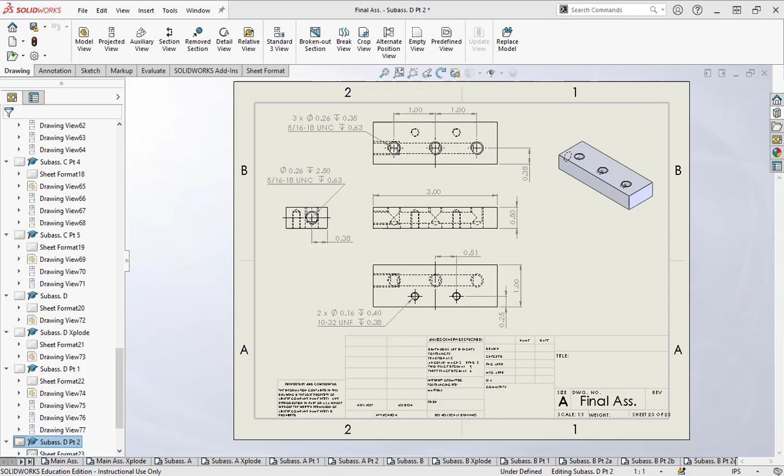Right, let's go ahead and take a look at the Three Sisters drawing package. And when I say a drawing package, this is one drawing file. This is a single drawing file. It is not 23 files. It is a single file. And if you look down here at the bottom, each of these tabs is a page.

So if you're one of those people that you're just used to having 50 drawing files, multiple drawing files, think about it this way. Each of these tabs represents a file. But nobody in business or anywhere wants to open up your folder containing 50 different drawings and look at them individually. You want to see how they relate to everything else and the subassembly.

So what we have here is a drawing package flow. So I'm going over right now the drawing package requirements for the Three Sisters and the 32 tall. These are the same requirements, the same flow. You want A size paper, 8.5 by 11. And this is the format that I'm looking for. This is the default A size in my SolidWorks install.

Okay, I want this mess. I want this. And here's the thing about sheet format. You don't get to choose your sheet format. The company you work for crams that sheet format down your throat, and that's what you use, and that's what I'm doing here. This is the worst sheet format that exists. So if you can make your stuff look good in this, you can make it look good anywhere.

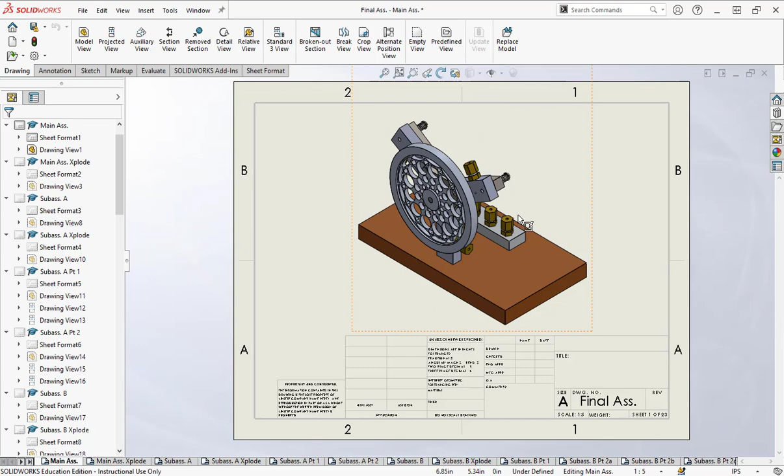The next page is the explode. I'll be going over explodes in a different video, but this is the main subassembly exploded into its subassemblies. The student chose 4 subassemblies. He or she named them A, B, C, and D. And they are labeled or ballooned with the corresponding letter. You could use a number if you want. This particular student chose to use letters. That's fine. And that's all it is. Notice that there are no callouts on the hardware. The hardware just sort of exists.

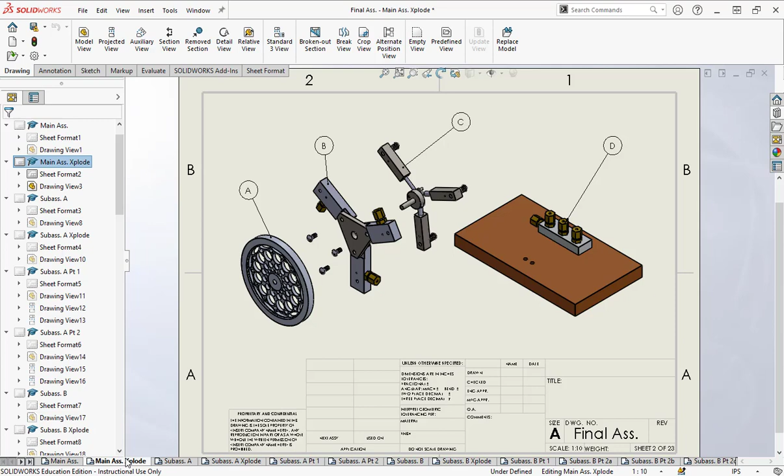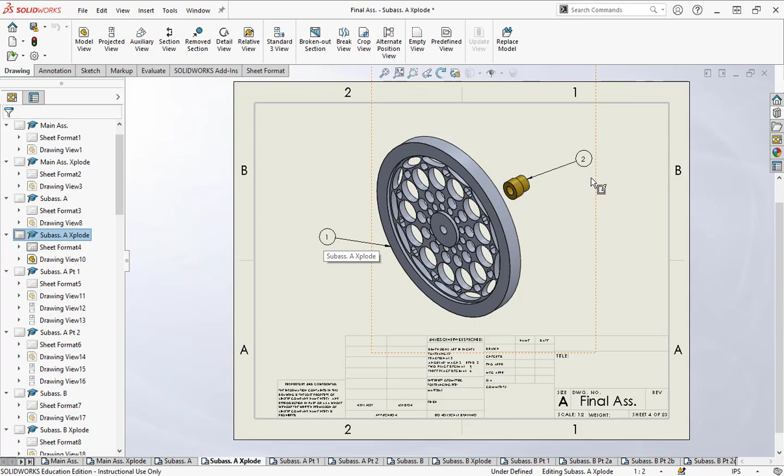Okay? So the first page is the main assembly. The next page is the main assembly exploded, also shaded with edges. The next page is the isometric view of the first subassembly. So in this case, this is subassembly A. My next page is going to be an isometric view, shaded with edges, of subassembly A. My next page will be the exploded view of subassembly A, and in this case, it's just 2 parts. But they are ballooned, they're labeled, and this particular student chose to use numbers for their parts, and they are labeled part 1 and part 2.

So my next page is the very first part of the very first subassembly. And in this case, it's the flywheel, and he called this subassembly A part 1. I wouldn't call it that. I would call it A1, personally, A-1. For your flywheel, because some of you are going to get super tricky with your flywheel, you do not need to dimension the inside. That would be a lifetime of regret in this one, okay?

I just want the side view showing the overall diameter and the overall thickness, which this particular student did do, and the cutout depth, okay? So this view, and it's evident on your drawing package which one I'm talking about. But this will save you a day, okay? You don't need to dimension the inside of this.

My next page is going to be the next part. Notice also, in terms of flow, when you get to the part, you will always have a small isometric view, shaded with edges, in the upper right-hand corner. It doesn't have to be the same scale as your front, top, right side, whatever. You're always going to have an isometric view.

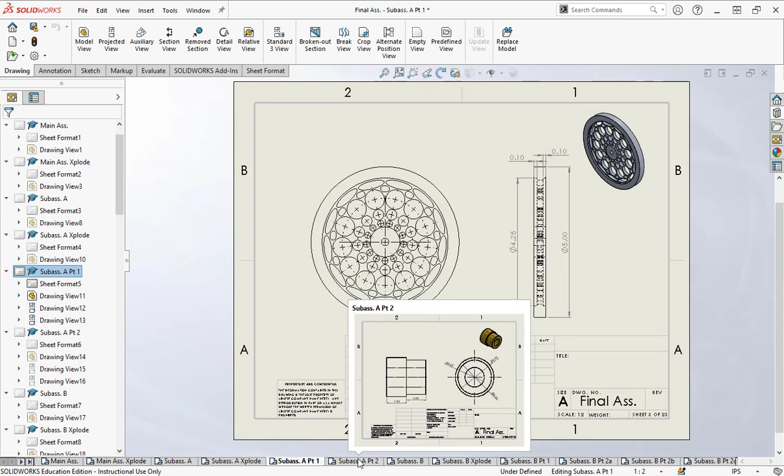And then the views that you have here should be as large as they can be, and you only need the views that you need to convey the dimensions that need to be conveyed. In this case, 2 views, plus the ISO up here, shaded with edges. Notice that these are not shaded with edges. It's basically just lines, and you may or may not use hidden lines visible. It depends on how to best represent your part.

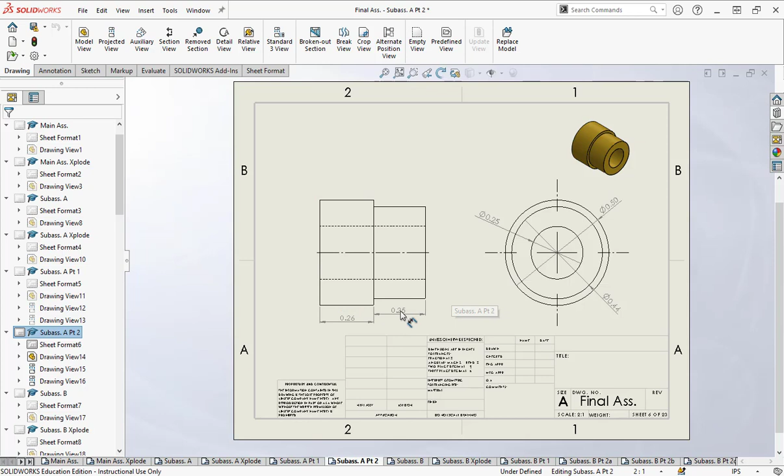This particular student, I think, messed up. I would probably never give both of these dimensions. I would be more comfortable with an overall and one of these.

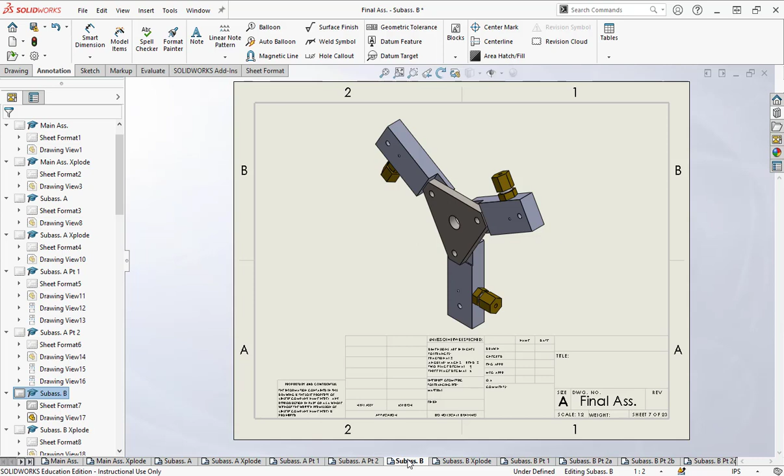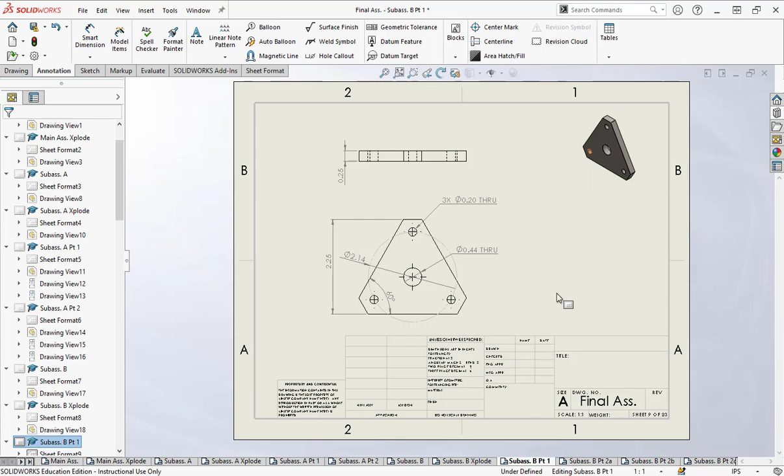Let's see, next page, next subassembly, and that whole process starts all over again. Next subassembly, shaded with edges. Next subassembly, exploded, shaded with edges, and ballooned. Notice that the hardware doesn't exist, it just floats. Next page, first part of this subassembly. So in this case, this is subassembly B, part 1, and fully dimensioned. Isometric view, upper right-hand corner, wireframe for everything else. And it just keeps going like that until you're done. Okay. So this finishes the requirements.

Now, here's some mistakes people make. And they don't think it's a mistake, they think it's a great idea. You never want to over-dimension things. You want to fully dimension things. Never, ever import all dimensions. It's a waste of time. It's going to import dimensions that you don't need, and it's going to leave out dimensions that you do need. It's not a magical button. You have a drawing package that has every critical dimension that's required because you use them to draw the parts. Okay? Don't let SOLIDWORKS assume it's going to do the right stuff, because it never does.

Using symmetry to your advantage. That's a whole other lecture, which we'll have. But don't forget to use center lines. Make sure you are using all the required views to fully dimension the part. If there's a feature, you need to show it, and that feature needs to be normal to the viewer. So in this case, like we had talked about with this crank disc, here's that hole that was in question last time, and notice that it's dimensioned normal to the viewer. You do not dimension hidden lines.

So you're going to have multiple views. This particular student, let's say this is the front view, this is the right view, and this is the top view. Now, a lot of you are going to import front, top, and right side because that's been beat into your brain over several years of drafting. Keep in mind that the front, top, and right side view is normal for a lot of parts, but is it what's required to show all the features? That's not always the case. You may have to show left, bottom, right side. It depends from part to part. There is no cookie cutter answer for that. You have to look at the part and determine what views are required.

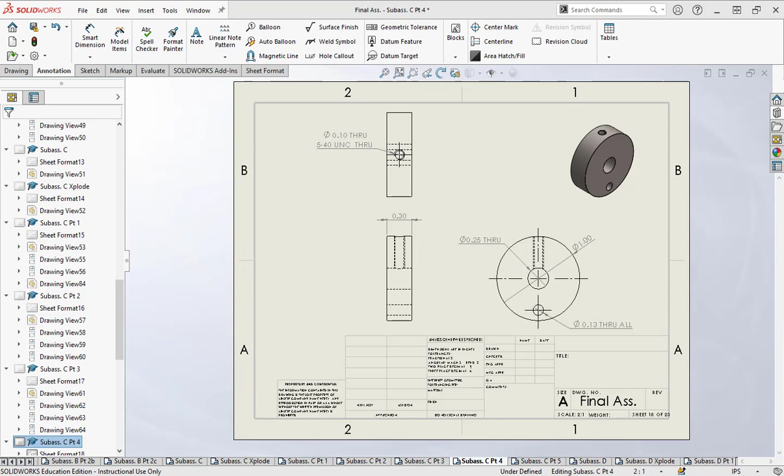Okay? All right. This already got too long. I'll have to edit this down.